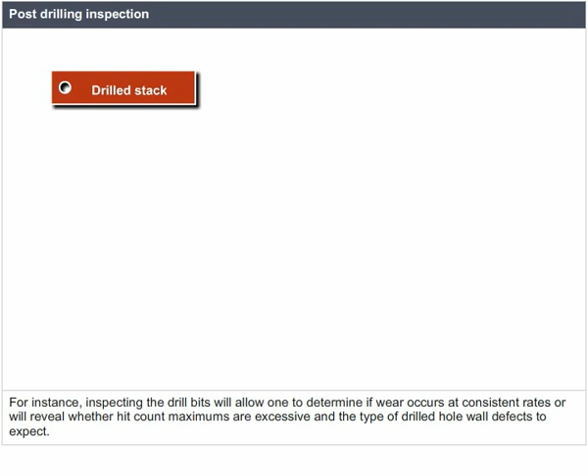Post-drilling inspection. A wealth of information is available by simply examining the materials from the drilled stack and the drill bits. For instance, inspecting the drill bits will allow one to determine if wear occurs at consistent rates, or will reveal whether hit count maximums are excessive and the type of drill hole wall defects to expect.

Bonded debris and/or extensive wear to the drill corners imply high drilling temperatures or materials that are not fully cured, and point to a problem with the materials or may suggest an excessive surface speed.

Extensive primary cutting edge wear indicates abrasive materials and may require lowering stack heights, reducing hit counts, or replacing entry or backup materials.

Post-drilling inspection continued. Burrs on the surfaces within the stack means that there is a problem with the way panels are assembled and pinned, or it may be the result of warped panels.

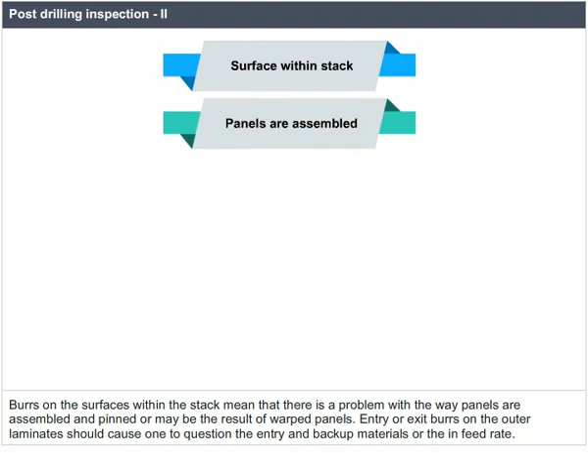Entry or exit burrs on the outer laminates should cause one to question the entry or backup materials, or the in-feed rate. The point of the post-drilling inspection process is that if one takes time on a regular basis to examine materials and drill bits after drilling, many drilling problems would be solved before they get out of hand.

Soldering. Soldering is a process in which two or more metal items are joined together by melting and flowing a filler metal, solder, into the joint. The filler metals have a lower melting point than the adjoining metal.

Soldering differs from welding in that soldering does not involve melting the workpieces. In brazing, the filler metal melts at a higher temperature, but the workpiece metal does not melt.

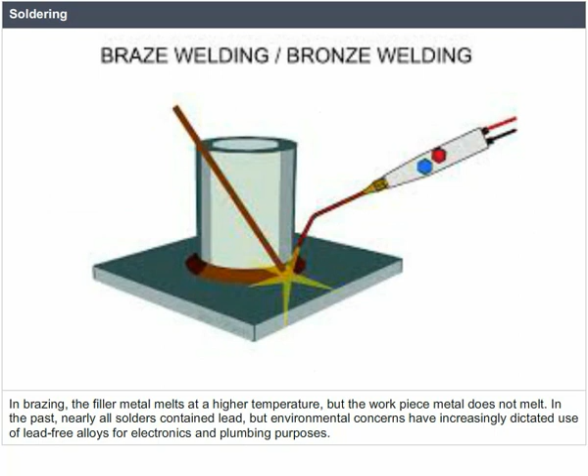In the past, nearly all solders contained lead, but environmental concerns have increasingly dictated use of lead-free alloys for electronics and plumbing purposes. Applications: soldering is used in plumbing, electronics, and metalworking, from flashing to jewelry.

Soldering provides reasonably permanent but reversible connections between copper pipes in plumbing systems, as well as joints in sheet metal objects such as food cans, roof flashing, rain gutters, and automobile radiators.

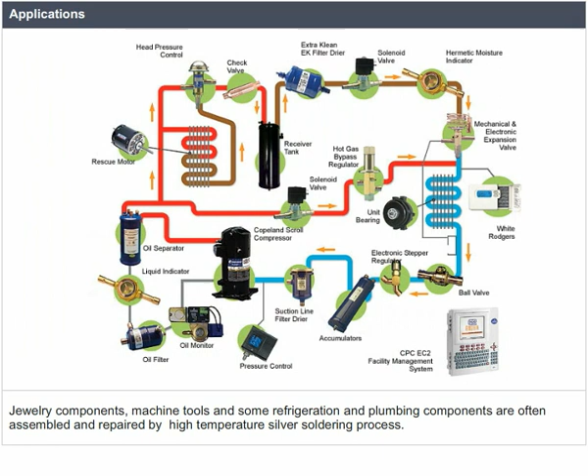Jewelry components, machine tools, and some refrigeration and plumbing components are often assembled and repaired by the high-temperature silver soldering process. Small mechanical parts are often soldered or brazed as well.

Soldering is also used to join lead came and copper foil in stained glass work. It can also be used as a semi-permanent patch for a leak in a container or cooking vessel. Electronic soldering connects electrical wiring and electronic components to printed circuit boards, PCBs.

Types of solders. Most solder metals are alloys of tin and lead. These alloys exhibit a wide range of melting points, so different types of soldering metal can be used for a variety of applications. The percentage of lead is kept low due to its toxic properties.

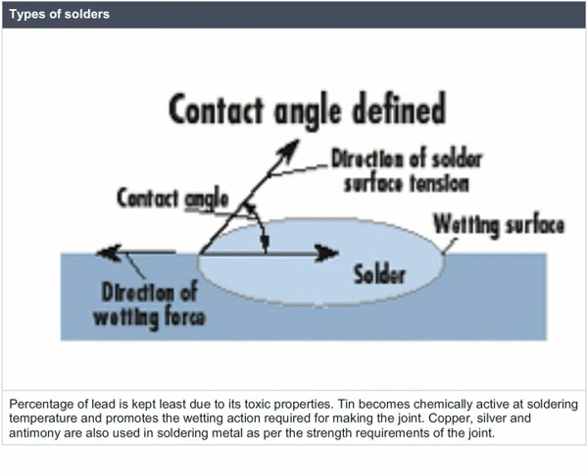Tin becomes chemically active at soldering temperature and promotes a wetting action required for making the joint. Copper, silver, and antimony are also used in soldering metal as per the strength requirements of the joint. Different solder metals have different melting points and varying applications.

Types of solders continued. A solder is selected on the basis of its melting point. If the metals to be joined have a high melting point, a solder of high melting point is generally selected, as it provides better strength of the joint.

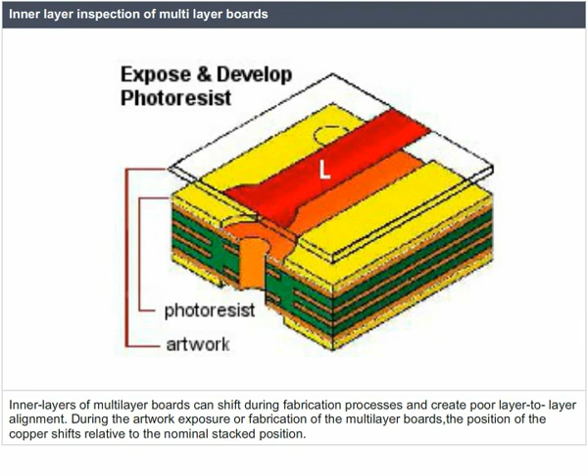Inner layer inspection of multi-layer boards. Inner layers of multi-layer boards can shift during fabrication processes and create poor layer-to-layer alignment.

During the artwork exposure or fabrication of the multi-layer boards, the position of the copper shifts relative to the nominal stacked position. This can create breakout or missing copper pads when drilling the interconnection holes.

Two methods of inspecting the inner layers of multi-layer panels exist. One that has been used for several years is X-ray. This technology has progressed significantly and is widely used.

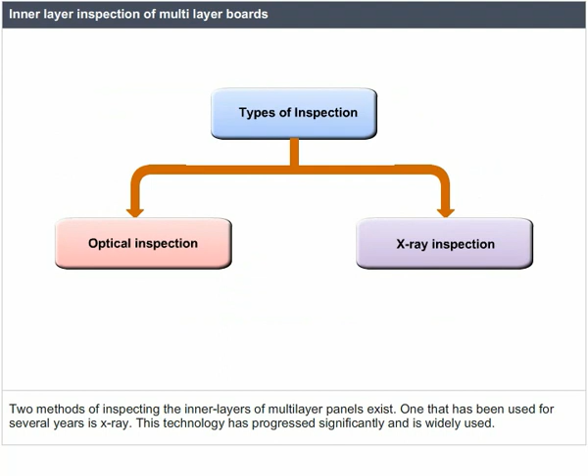X-ray technology is used to inspect the inner layers of multi-layer PCBs and to verify that the drill pads are located properly. Inner layer shift is identified easily in an X-ray image, and a simple technique can be used to measure the misalignment accurately.

In developing the PCB artwork, a set of stacked pads are located in the coupon area. These are inspected and a best fit centering is calculated.

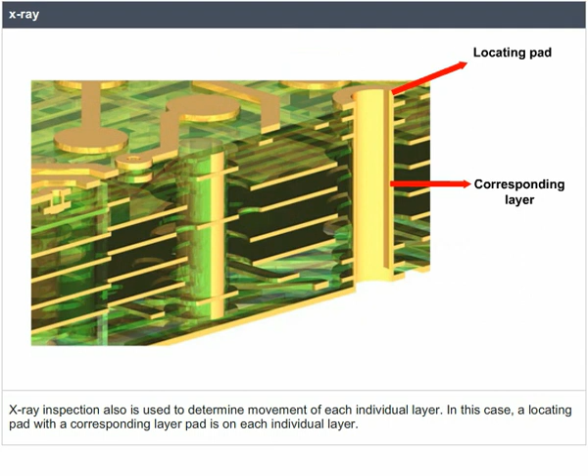X-ray inspection is also used to determine movement of each individual layer. In this case, a locating pad with a corresponding layer pad is on each individual layer. The system can measure the distance from the locating pad to a layer pad and determine movement of each layer due to the location of the layer pads.

PCBs can be inspected after tooling holes are drilled to verify that they are in the proper locations. In addition, X-ray inspection can be performed after final drilling to verify that the holes are centered within the pads.

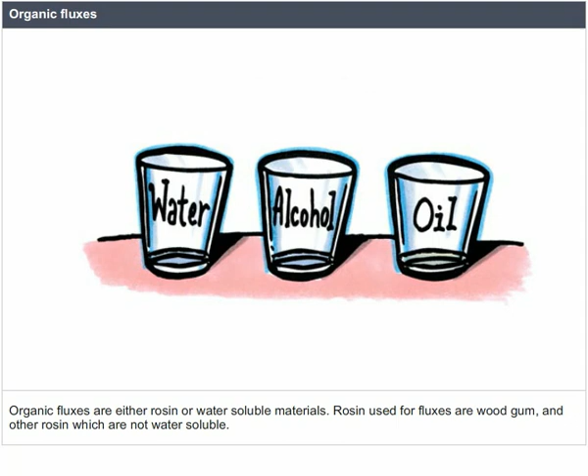Types of soldering fluxes. Soldering fluxes can be classified as organic and inorganic fluxes. Organic fluxes are either rosin or water-soluble materials. Rosin used for fluxes are wood gum and other rosin which are not water-soluble. Organic fluxes are mostly used for electrical and electronic circuit making.

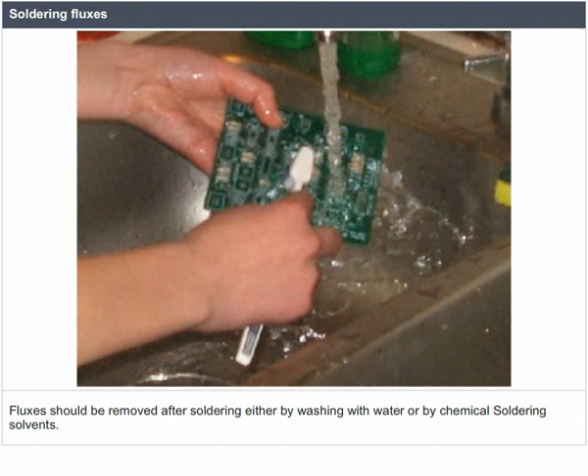These are chemically active at elevated temperature but non-corrosive at room temperature. Inorganic fluxes consist of inorganic acids, mixture of metal chlorides. These are used to achieve rapid and active fluxing where formation of oxide films is a problem. Fluxes should be removed after soldering either by washing with water or by chemical soldering solvents.

The main functions performed by fluxes are: remove oxide films and tarnish from base part surfaces, prevent oxidation during heating, and promote wetting of the faying surfaces. The fluxes should be molten at soldering temperature, be readily displaced by the molten solder during the process, and leave a residue that is non-corrosive and non-conductive.

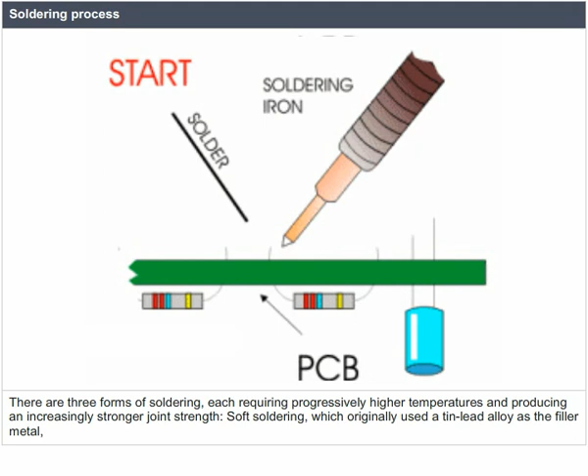Soldering process. There are three forms of soldering, each requiring progressively higher temperatures and producing an increasingly stronger joint strength: soft soldering, which originally used a tin lead alloy as a filler metal; silver soldering, which uses an alloy containing silver; and brazing, which uses brass alloy for the filler.

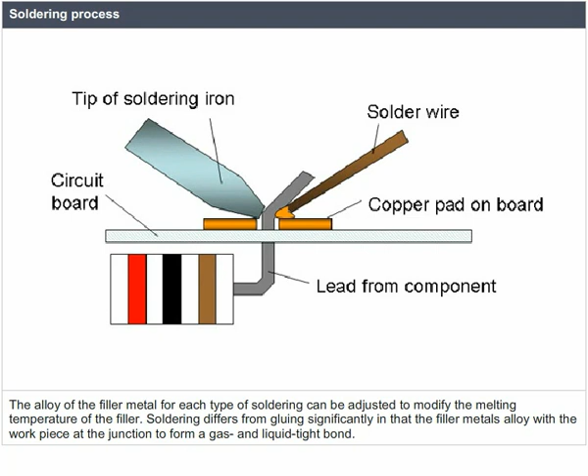The alloy of the filler metal for each type of soldering can be adjusted to modify the melting temperature of the filler. Soldering differs from gluing significantly in that the filler metals alloy with the workpiece at the junction to form a gas and liquid tight bond.

Soft soldering is characterized by having a melting point of the filler metal below approximately 400 degrees Celsius or 750 degrees Fahrenheit, whereas silver soldering and brazing use higher temperatures, typically requiring a flame or carbon arc torch to achieve the melting of the filler. Soft solder filler metals are typically alloys that have liquidus temperatures below 350 degrees Celsius.

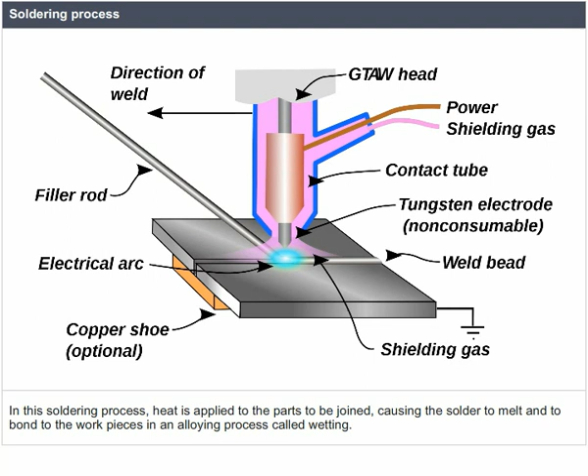In this soldering process, heat is applied to the parts to be joined, causing the solder to melt and bond to the workpieces in an alloying process called wetting. In stranded wire, the solder is drawn up into the wire by capillary action in a process called wicking. Capillary action also takes place when the workpieces are very close together or touching.

The joint's tensile strength is dependent on the filler metal used. Soldering produces electrically conductive, water and gas-tight joints. Each type of solder offers advantages and disadvantages. Soft solder is so called because of the soft lead that is primarily its ingredient.

Soft soldering uses the lowest temperatures but does not make a strong joint and is unsuitable for mechanical load-bearing applications. It is also unsuitable for high-temperature applications as it softens and melts.

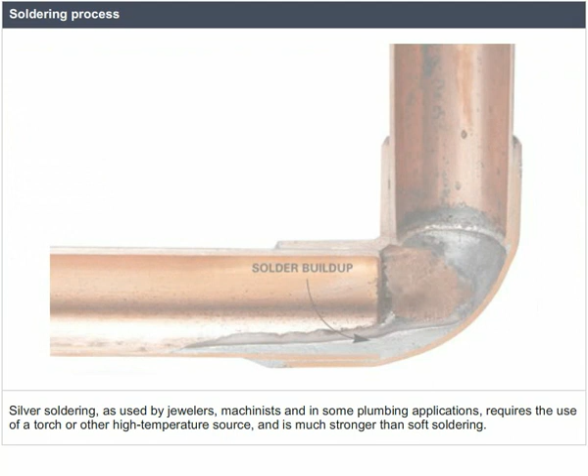Silver soldering, as used by jewelers, machinists, and in some plumbing applications, requires the use of a torch or other high-temperature source and is much stronger than soft soldering.

Brazing provides the strongest joint but also requires the hottest temperatures to melt the filler metal, requiring a torch or other high-temperature source and darkened goggles to protect the eyes from the bright light produced by the white-hot work. It is often used to repair cast-iron objects, wrought iron furniture, etc.

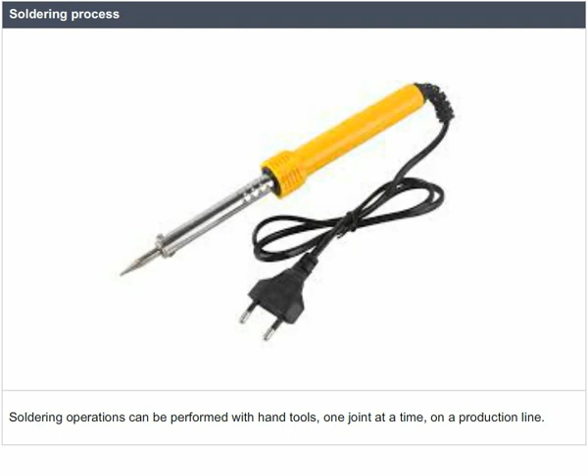Soldering operations can be performed with hand tools, one joint at a time, on a production line. Hand soldering is typically performed with a soldering iron, soldering gun or a torch, or occasionally a hot air pencil. Sheet metal work was traditionally done with soldering coppers directly heated by a flame, with sufficient stored heat in the mass of the soldering copper to complete a joint.

Torches or electrically heated soldering irons are more convenient. All soldered joints require the same elements: cleaning of the metal parts to be joined, fitting up the joint, heating the parts, applying flux, applying the filler, removing heat and holding the assembly still until the filler metal has completely solidified. Depending on the nature of flux material used, cleaning of the joints may be required after they have cooled.

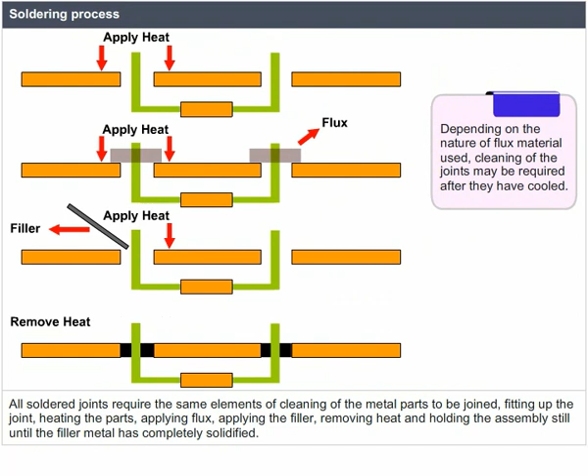Each alloy has characteristics that work best for certain applications, notably strength and conductivity, and each type of solder and alloy has different melting temperatures.

The term silver solder likewise denotes the type of solder that is used. Some soft solders are silver-bearing alloys used to solder silver-plated items. Lead-based solders should not be used on precious metals because the lead dissolves the metal and disfigures it.

Soldering and brazing process.

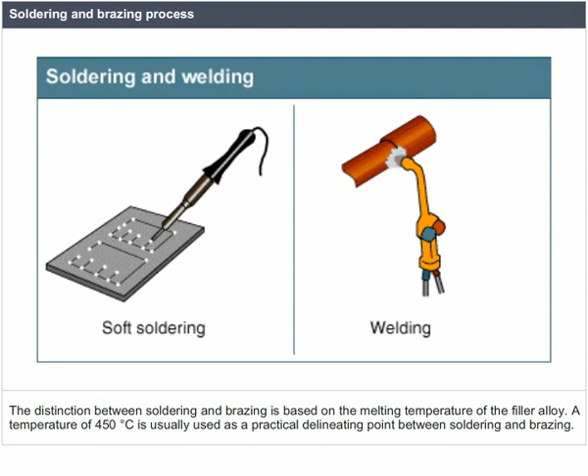The distinction between soldering and brazing is based on the melting temperature of the filler alloy. A temperature of 450 degrees Celsius is usually used as a practical delineating point between soldering and brazing. Soft soldering can be done with a heated iron, whereas the other methods require a high-temperature torch or furnace to melt the filler metal. Different equipment is usually required since a soldering iron cannot achieve high enough temperatures for hard soldering or brazing. Brazing filler metal is stronger than silver solder, which is stronger than lead-based soft solder.

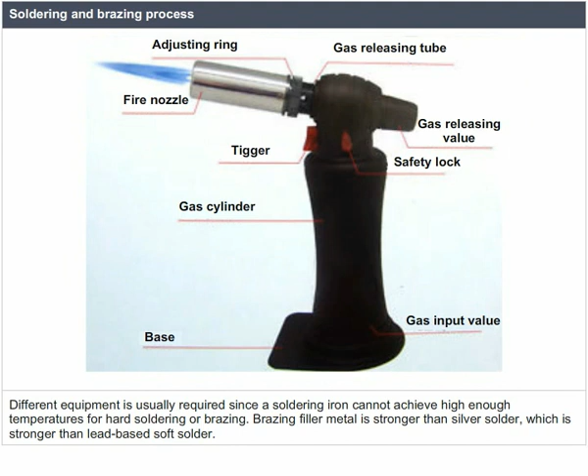Brazing solders are formulated primarily for strength. Silver solder is used by jewelers to protect the precious metal and by machinists and refrigeration technicians for its tensile strength but lower melting temperature than brazing, and the primary benefit of soft solder is a low temperature.

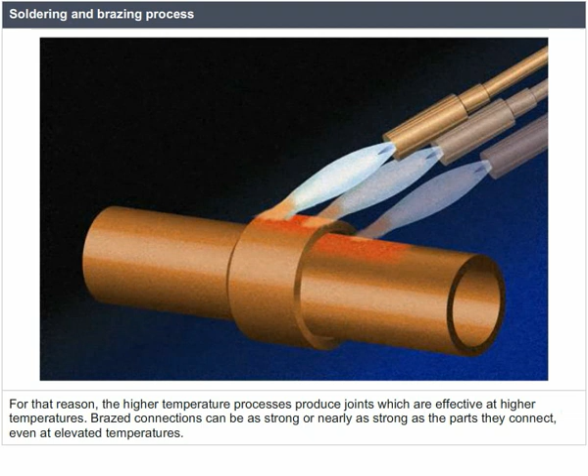Since the joint is produced using a metal with a lower melting temperature than the workpiece, the joint will weaken as the ambient temperature approaches the melting point of the filler metal. For that reason, the higher temperature processes produce joints which are effective at high temperatures. Brazed connections can be as strong or nearly as strong as the parts they connect, even at elevated temperatures.

Optical inspection has been discussed elsewhere. It is generally applied early in the fabrication process as a yield improvement and data collection tool, not as a means of final product qualification.

However, with improvements in resolution, the type of defects that may escape undetected becomes somewhat more limited, and optical inspection is argued as a possible means of final testing.

With complex multi-layer product, optical inspection will not be able to identify assembly or contamination-induced defects internal to the board in any case, and may still be limited in cases of contaminants or very fine geometry shorts and opens on external layers.

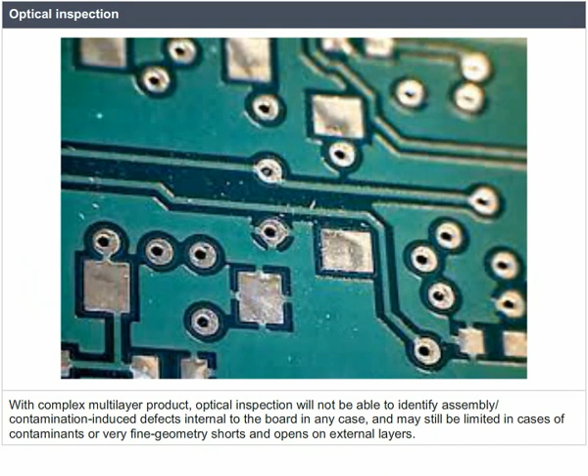The equipment is somewhat slower than universal grid test systems, particularly when run at very high resolution. For such reasons, it is still not common practice to employ optical inspection by itself as a substitute for electrical testing. This may be a method that develops further in the future or that finds acceptance in special circumstances.

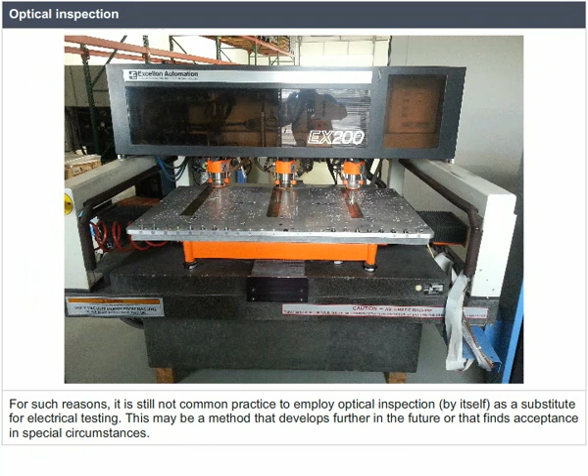Inspection under UV light is used to verify complete coverage and touch-up. Coatings contain a fluorescent dye that will glow under UV light and show where the coating has or has not been applied. Areas without coating can be touched up at this time.

The areas most susceptible to insufficient coating are corners of parts where the coating can flow away and leave little behind, the protruding ends of through-hole part leads, and the shadowed areas under or behind larger components.

If large flat areas are uncoated and show beads of coating, there is a wetting problem due to improper surface preparation or a material incompatibility.

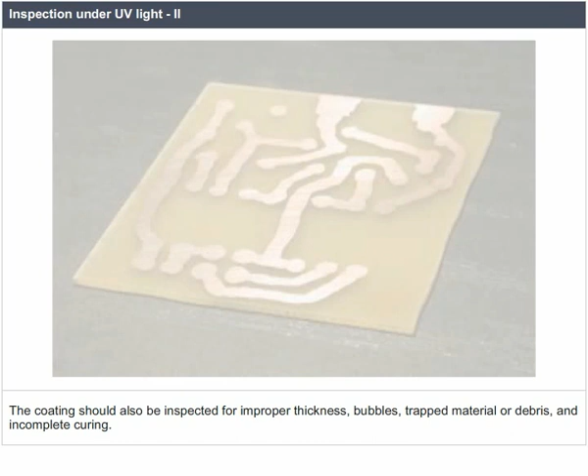Continuing inspection under UV light: the coating should also be inspected for improper thickness, bubbles, trapped material or debris, and incomplete curing.

Mask material should be removed carefully. To prevent peeling, it may be desirable to score or cut the coating at the edge of the mask so that the coating tears along the correct line.

Ensure that the mask is removed entirely and that no residue has been left behind on the board. Latex mask that has been overheated will be sticky and difficult to remove completely, as will overheated masking tapes.

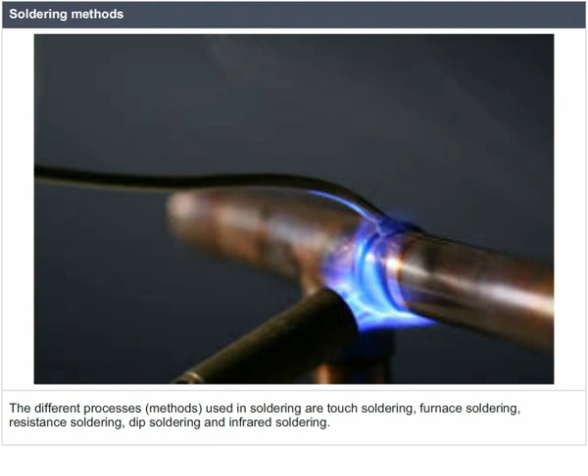Soldering methods: there is a lot of similarity between soldering processes. The different processes or methods used in soldering are touch soldering, furnace soldering, resistance soldering, dip soldering, and infrared soldering. These may apply to hand soldering, wave soldering, and reflow soldering.

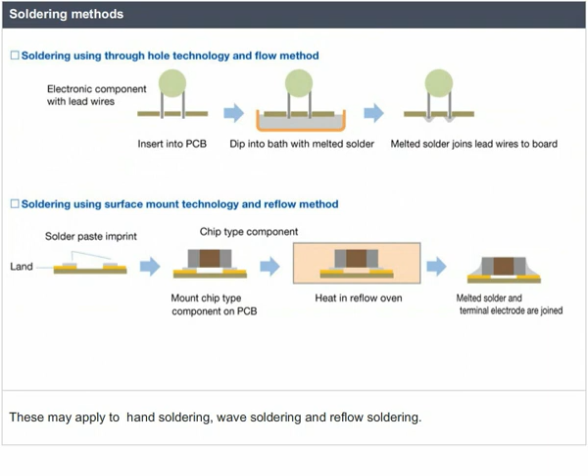Hand soldering is done manually using a solder iron. Small joints are made this way in a very short duration of approximately 1 second.

Wave soldering is a mechanical technique that allows multiple lead wires to be soldered to a printed circuit board as it passes over a wave of molten solder.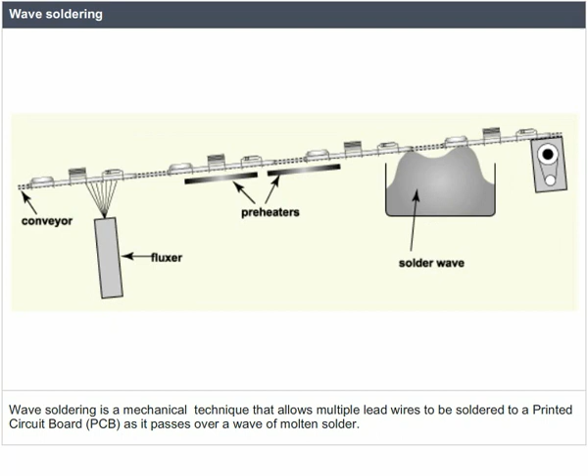In this process, a PCB on which electronic components have been placed with their lead wires extending through the holes in the board is loaded onto a conveyor for transport through the wave soldering equipment. The conveyor supports the PCB on its sides, so its underside is exposed to the processing steps, which consist of the following.

Flux is applied through foaming, spraying, or brushing, and wave soldering is used to pump liquid solder from a molten bath onto the bottom of the board to make soldering connections between lead wires and the metal circuit on the board. Reflow soldering is also widely used in electronics to assemble surface mount components to printed circuit boards.

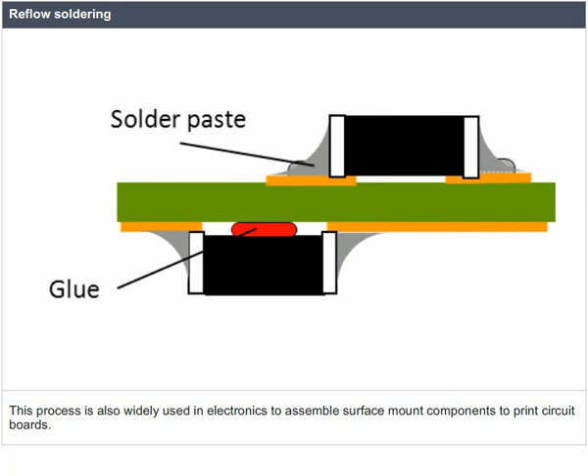In this process, a solder paste consisting of solder powders in a flux binder is applied to spots on the board where electrical contacts are to be made between surface mount components and the copper circuit. The components are placed on the paste spots and the board is heated to melt the solder, forming mechanical and electrical bonds between the component leads and the copper on the circuit boards.

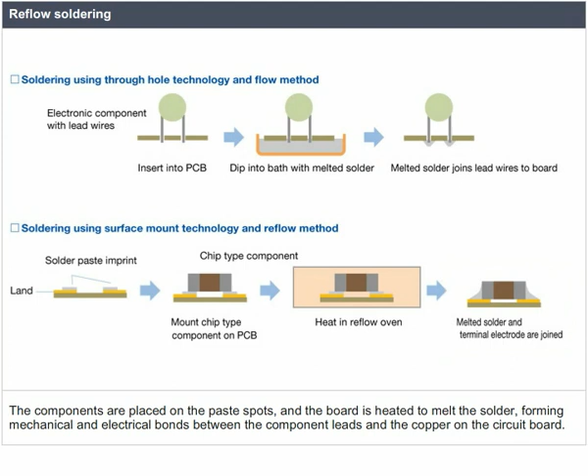Inspection and testing. There are various types of connector inspection: PCA inspection, solder sliver inspection, electrical testing, and tool check.

Connector inspection. Check the connector after pressing for even bottom side pin protrusion, top side connector body seating height, damage to the connector body, inaccurate mating pin positions within the connector as opposed to within the board, and damage or movement of electrical shields if the connector is so equipped.

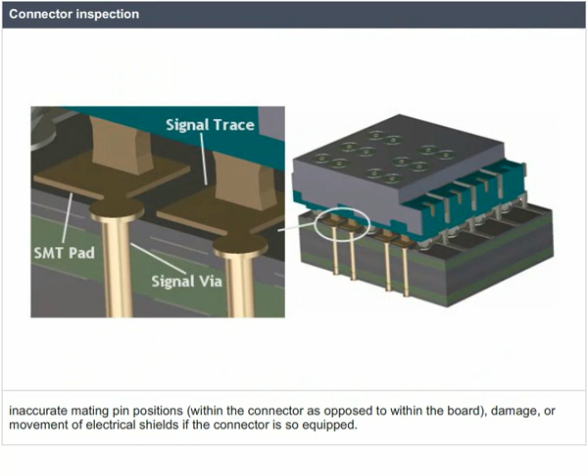PCA inspection. Check the PCA for surface damage in the area of the pressing operation. A mispositioned or damaged press tool or board support can damage components or overly compress the laminate, causing outer or inner layer trace damage.

Look for errant tooling marks on the PWB surface after the press fitting operation. Overcompression of the board can lead to compressed or severed traces within the board. A compressed trace may impact current capacity and result in localized circuit overheating or otherwise impact signal integrity.

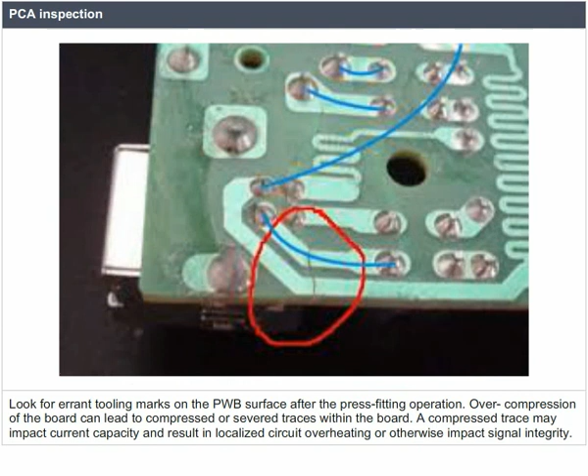Solder sliver inspection. Check the bottom side of the board for solder sliver formation. This is especially relevant in the case of HASL, hot air solder leveling boards. Brush these out if required and inspect. Loose slivers may cause electrical shorting on the board or other boards within the system enclosure.

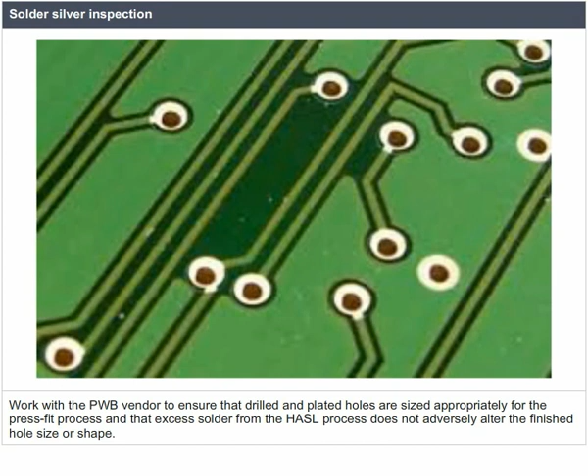Work with the PWB vendor to ensure that drilled and plated holes are sized appropriately for the press fit process and that excess solder from the HASL process does not adversely alter the finished hole size or shape.

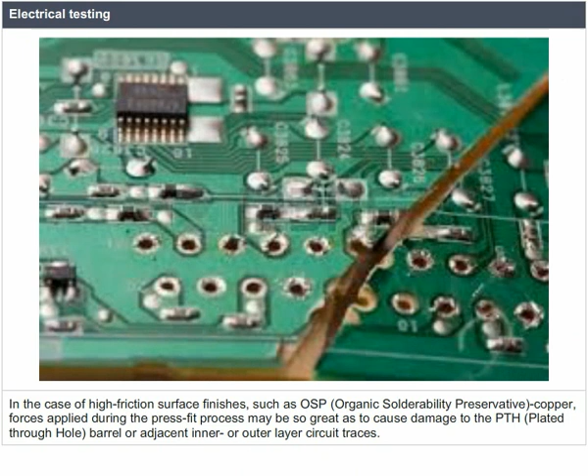Electrical testing. In the case of high-friction surface finishes, such as OSP, Organic Solderability Preservative copper, forces applied during the press-fit process may be so great as to cause damage to the PTH, plated through-hole barrel, or adjacent inner or outer layer circuit traces. Check the board visually and by electrical test as part of the first article inspection.

Check tooling frequently. Check for excessive tool wear or damage. A damaged tool can ruin a connector or PWB and replicate the damage over many boards.

Soldering tools. The main tool used for soldering is a soldering iron. In addition to the soldering iron, some consumables are also used in the process of soldering, like fluxes, solder wire or stick, and spelter.

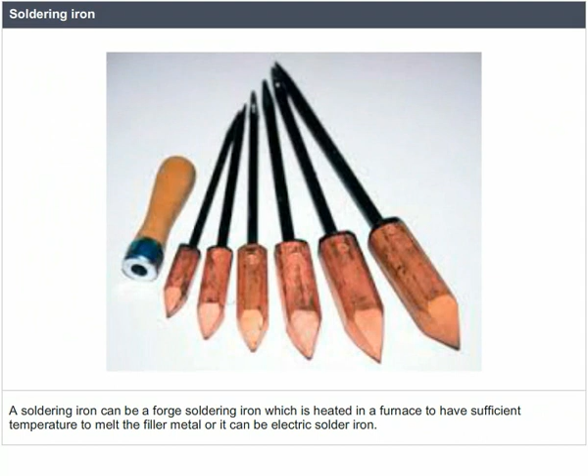Soldering iron. It consists of a copper bit attached to an iron rod at its one end and a wooden handle at the other. It is used to melt the filler metal and paste it to make the joint. A soldering iron can be a forge soldering iron, which is heated in a furnace to have sufficient temperature to melt the filler metal, or it can be an electric solder iron.

Electric solder iron is heated by passing electric current through it. Use of electric solder iron is popular and cost-effective. It is used in making very precise joints in electronic and electrical equipment.

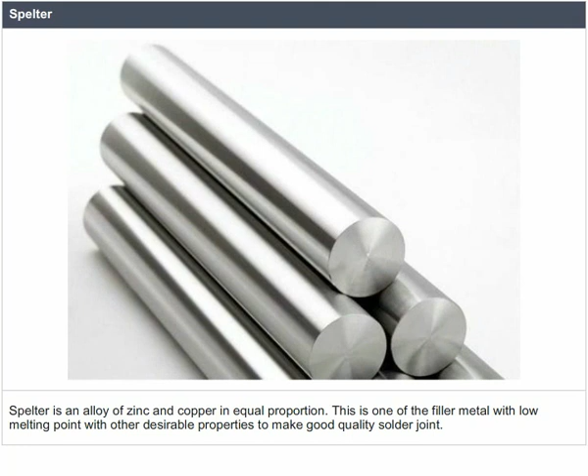Spelter. Spelter is an alloy of zinc and copper in equal proportion. This is one of the filler metals with a low melting point, with other desirable properties to make a good quality solder joint.

Different types of solders and fluxes, which are common consumables used in soldering, have already been described. Some precautions are to be followed to keep the soldering tools as described.

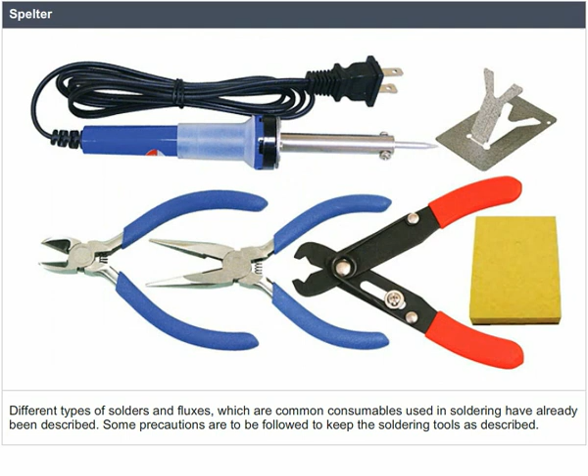Selection of correct tool according to the process. A defective tool should not be used. Electrically heated solder iron should have proper earthing. Hot solder iron, when idle, should be placed on its proper stand. Tip of the solder iron should be cleaned before its use. Solder iron should be gripped at its handle while in use.

Desoldering and resoldering. Used solder contains some of the dissolved base metals and is unsuitable for reuse in making new joints. Once the solder's capacity for the base metal has been achieved, it will no longer properly bond with the base metal, usually resulting in a brittle, cold solder joint with a crystalline appearance.

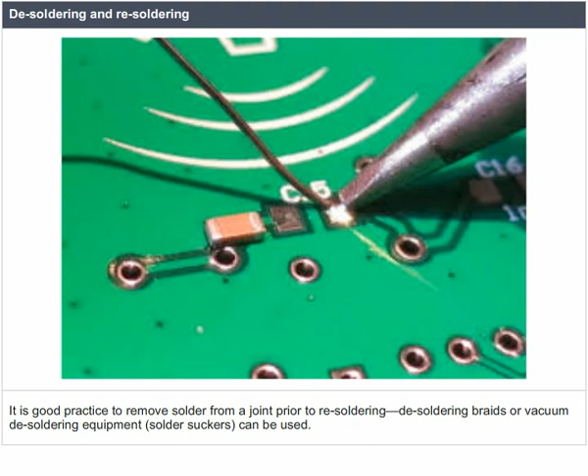It is good practice to remove solder from a joint prior to resoldering. Desoldering braids or vacuum desoldering equipment, solder suckers, can be used. Desoldering wicks contain plenty of flux that will lift the contamination from the copper trace and any device leads that are present.

This will leave a bright, shiny, clean junction to be resoldered. The lower melting point of solder means it can be melted away from the base metal, leaving it mostly intact, though the outer layer will be tinned with solder.

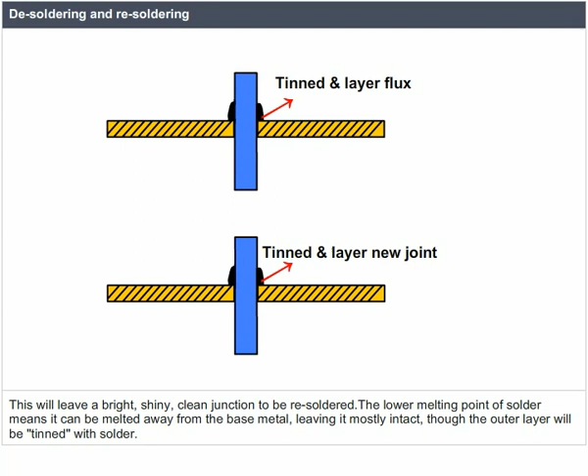Flux will remain, which can easily be removed by abrasive or chemical processes. This tinned layer will allow solder to flow into a new joint, as well as making the new solder flow very quickly and easily.

Lead-free electronic defects. More recently, environmental legislation has specifically targeted the wide use of lead in the electronics industry. The RoHS Restriction of Hazardous Substances directive in Europe requires many new electronic circuit boards to be lead-free by 1st July 2006, mostly in the consumer goods industry, but in some others as well.

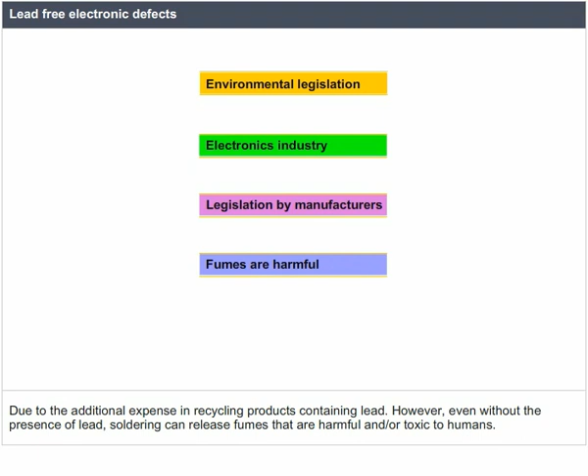In Japan, lead was phased out prior to legislation by manufacturers due to the additional expense in recycling products containing lead. However, even without the presence of lead, soldering can release fumes that are harmful and toxic to humans. It is highly recommended to use a device that can remove the fumes from the work area either by ventilating outside or filtering the air.

It is a common misconception that lead-free soldering requires higher soldering temperatures than lead-tin solder. The wetting temperature in lead-tin solder is higher than the melting point and is a controlling factor. Wave soldering can proceed at the same temperature as previous lead-tin soldering. Nevertheless, many new technical challenges have arisen with this new endeavor.

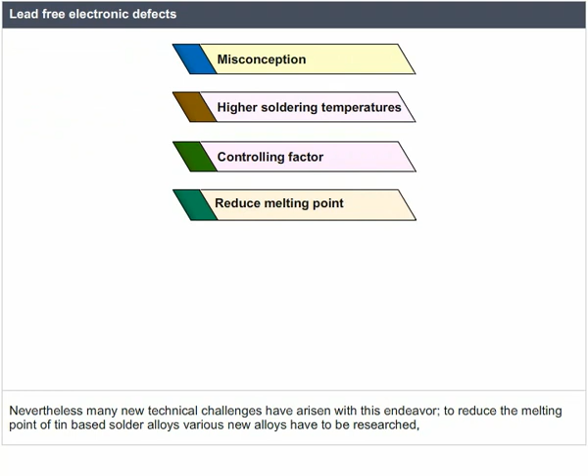To reduce the melting point of tin-based solder alloys, various new alloys have to be researched with additives of copper, silver, and bismuth as typical minor additives to reduce melting point and control other properties. Additionally, tin is a more corrosive metal and can eventually lead to the failure of solder baths, etc.

Lead-free construction has also extended to components, pins, and connectors. Most of these pins use copper frames and either lead, tin, gold, or other finishes. Tin finishes are the most popular of lead-free finishes. Nevertheless, this brings up the issue of how to deal with tin whiskers.

The current movement brings the electronic industry back to the problem solved in the 1960s by adding lead. JEDEC has created a classification system to help lead-free electronic manufacturers decide what provisions to take against whiskers depending upon their application.

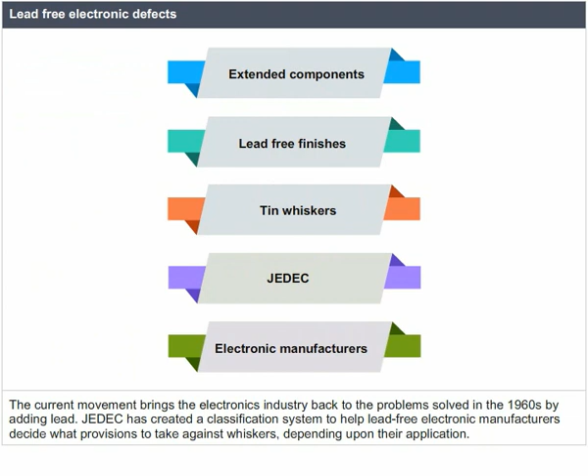Soldering defects. In the joining of copper tube, failure to properly heat and fill a joint may lead to a void being formed. This is usually a result of improper placement of the flame. If the heat of the flame is not directed at the back of the fitting cup, and the solder wire is applied at a 180 degree angle opposite the flame, then solder will quickly fill the opening of the fitting, trapping some flux inside the joint.

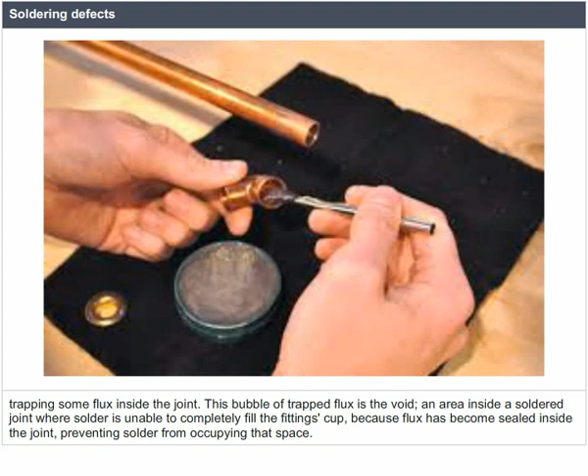This bubble of trapped flux is a void, an area inside a soldered joint where solder is unable to completely fill the fitting's cup because flux has become sealed inside the joint, preventing solder from occupying that space.

Soldering procedure. The following sequential steps should be carried out as soldering procedure. Workpieces which are to be joined together should be perfectly clean. There should not be any dirt, dust, rust, paint, or grease. This is so that the solder or spelter can stick to the joint with proper strength. Cleaning is done with the help of a file or sandpaper.

In case of joining conducting wires, insulation of the portion to be joined should be perfectly removed. Sometimes chemicals are used to clean the workpieces. Descaling is done by dipping the workpieces in dilute hydrochloric acid.

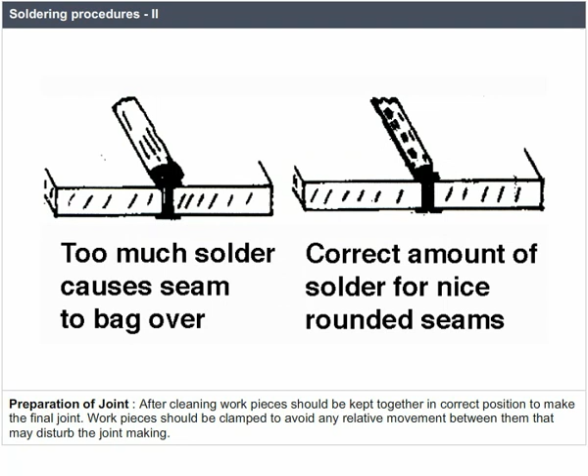Soldering procedures continued. Preparation of joint. After cleaning, workpieces should be kept together in correct position to make the final joint. Workpieces should be clamped to avoid any relative movement between them that may disturb the joint making. At the joint, small grooves are made on the workpieces to facilitate better flow of molten solder and so good strength of the joint.

There are two objectives of a joint: to bear load and to make electrical contact. In case of load-bearing joints, lap joints or butt joints are preferred. It is important to note that the strength of a soldered joint cannot be compared with a welded joint.

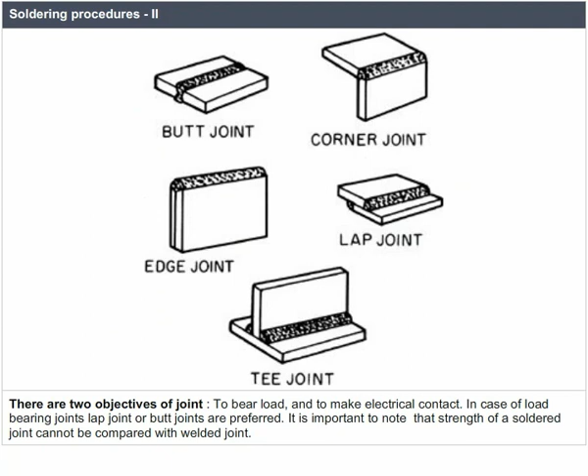If electrical contact is to be made, the solder should be selected so that the resistance of the joint matches the resistance of the conductor.

Fluxing includes selection of appropriate flux and its application to the joint. Selection of flux depends on the material of the workpiece, keeping its purpose in view. It is applied to the joint with the help of a soldering brush before soldering. It avoids oxidation of molten metal, helps in flow of molten solder into the joint, and so maintains strength of the joint.

Inspection categories. There are 4 types of inspection categories: material inspection, qualification inspection, quality conformance inspection, and reliability testing.

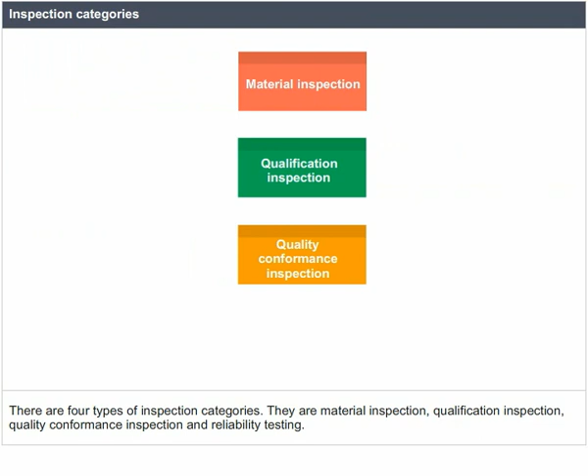Material inspection usually consists of certifications from the material supplier, supported by data from the supplier's own inspections. The materials used must be inspected by the PCB manufacturer to ensure compliance with customer requirements.

Qualification inspection. The PCB supplier must provide proof to the user of its qualifications to build the product specified. The user must then review this proof in order to minimize the risk associated with buying from the PCB manufacturer.

This process usually includes a PCB manufacturer supplying a self-declaration of capability, such as those found in the IPC 1710, and then supplying some kind of physical sample or testing data to support the assertions made in the self-declaration. It is up to the PCB user to determine the level and detail of qualification required.

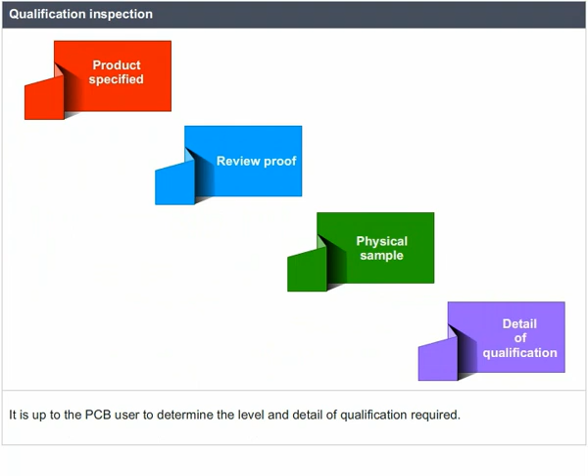Quality conformance inspection. These product verification inspections use specified acceptability criteria and are performed prior to shipment of PCBs to customers. These inspections can be defined either by industry or customer standards, or by a combination of both.

Reliability testing. This testing consists of looking for imperfections in the PCB that may show up at some time during the product's field life. They include accelerated life testing for both the interconnection and insulation attributes of the PCB.

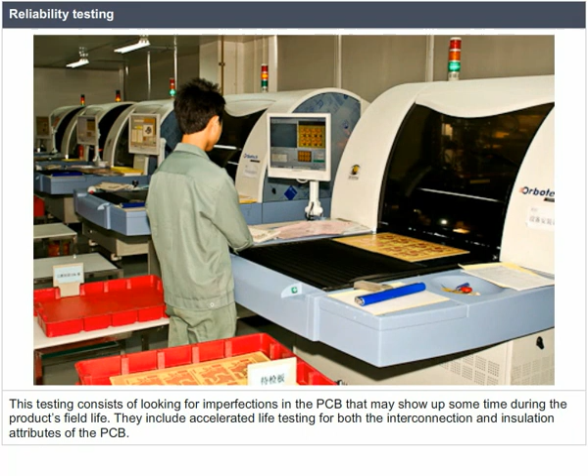Soldering defects and their remedies. Some of the common soldering defects are discussed below. Granular formation at the surface of the joint of solder is one of the common soldering defects.

Formation of spheroids at the surface of soldering joint is also a similar defect. This happens due to underheating or overheating of soldering iron, or insufficient use of flux. Formation of spheroids makes the joint ugly and weak in strength.

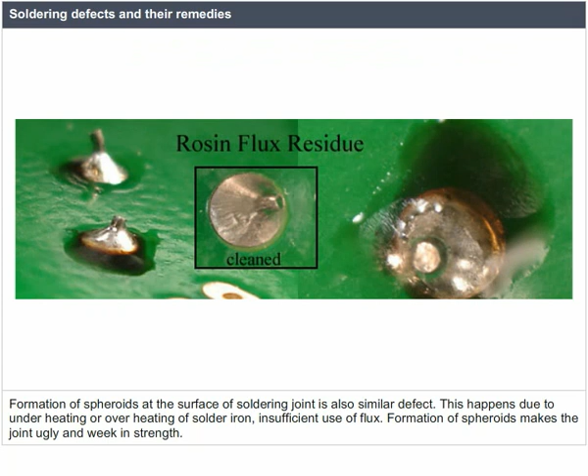Improper or uneven application of flux may make the joint of weak strength. Proper coordination between flux application and soldering makes the joint of good quality.

Safety precautions in soldering. Keep the soldering iron always on its stand. All electrically operated instruments and equipment should have proper earthing.

Sometimes emission of smoke during soldering operation may become poisonous due to a particular type of flux. Operators should have protection from the same. Flux should be applied gradually while soldering.

While diluting HCl, water should not be added to HCl, but HCl should be mixed into the water drop by drop to avoid accidents.

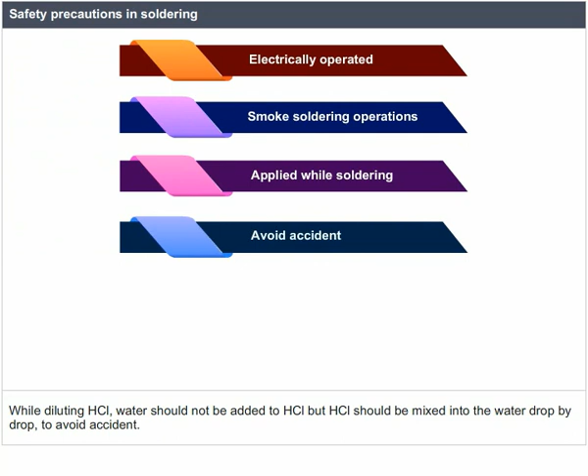Workplace should have enough ventilation and smoking should be strictly prohibited during the operation. Workplace should have the facility of first aid. It should be noted that good quality surface preparation always contributes to a good quality joint.

Electronics. Various problems may arise in the soldering process which lead to joints that are non-functional either immediately or after a period of use. The most common defect when hand soldering results from the parts being joined not exceeding the solder's liquidus temperature, resulting in a cold solder joint.

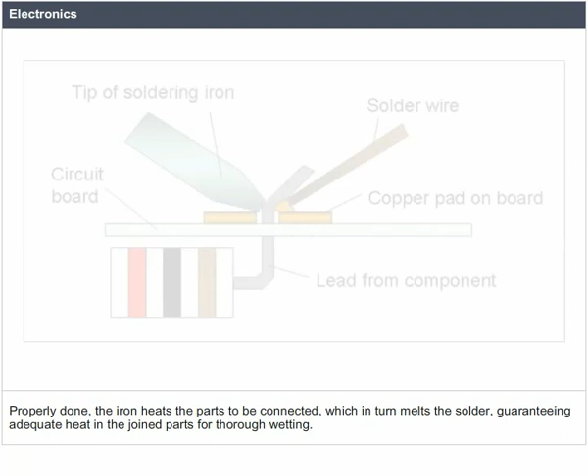This is usually the result of the soldering iron being used to heat the solder directly rather than the parts themselves. Properly done, the iron heats the parts to be connected, which in turn melts the solder, guaranteeing adequate heat in the joined parts for thorough wetting.

In electronic hand soldering, the flux is embedded in the solder. Therefore, heating the solder may cause the flux to evaporate before it cleans the surfaces being soldered. A cold solder joint may not conduct at all, or may conduct only intermittently.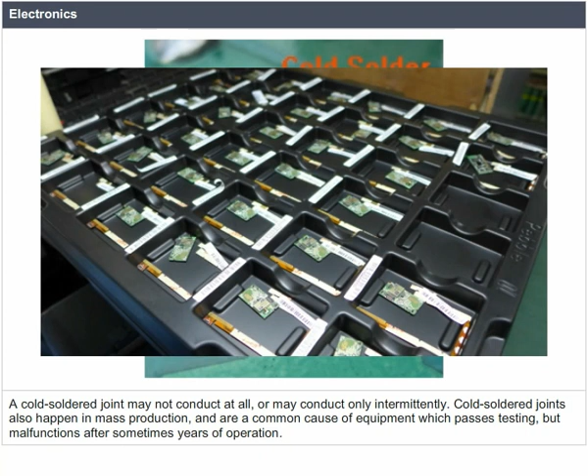Cold solder joints also happen in mass production and are a common cause of equipment which passes testing but malfunctions after some years of operation. A dry joint occurs when the cooling solder is moved, and often occurs because the joint moves when the soldering iron is removed from the joint.

Soldering types and features. Soldering methods are broadly divided into two types: the partial heating method and the total heating method.

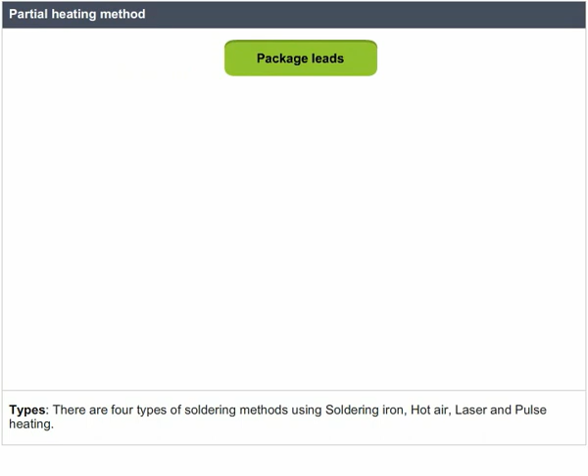Partial heating method. Heat is applied to the package leads and/or PWB, printed wiring board, in a localized manner. There are four types of soldering methods: using soldering iron, hot air, laser, and pulse heating.

Features: Partial heating involves less heat stress on the device and printed wiring board, but is unsuitable for large volume production. Therefore, this method is mainly used to correct soldering or for devices with low heat resistance.

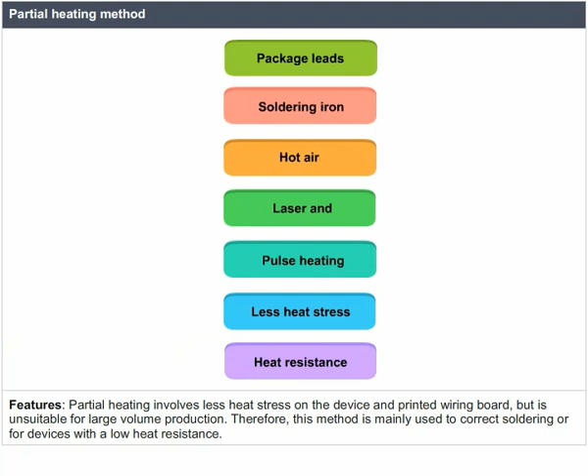Total heating method. Heat is applied to the entire package and/or PWB. There are various types of soldering methods, such as infrared reflow, convection reflow, infrared convection combined, VPS (vapor phase soldering), and flow wave soldering.

Features: Because of excellence in productivity and running cost, the total heating method is widely used. However, this method can place considerable heat stress on the semiconductor device and board.

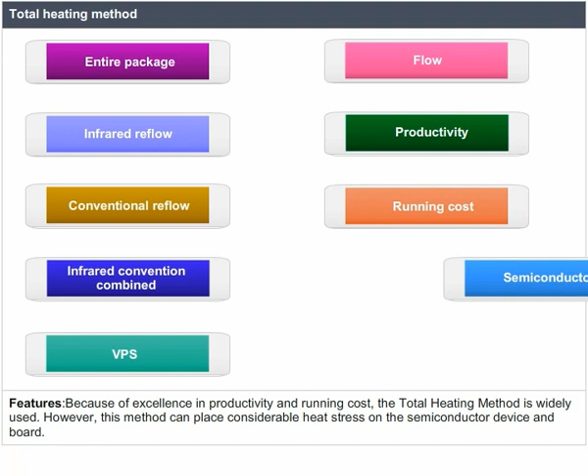Inspection criteria. When inspecting PCBs, the requirements can be separated into externally observable attributes and internally observable attributes. The actual requirements vary by specification, but the requirements stated generally follow IPC document guidelines.

Hand soldering tools widely used for electronic work include the electric soldering iron, which can be fitted with a variety of tips ranging from blunt to very fine, to chisel heads for hot cutting plastics rather than soldering. The simplest irons do not have temperature regulation. Small irons rapidly cool when used to solder, say, a metal chassis, while large irons have tips too cumbersome for working on PCBs and similar fine work.

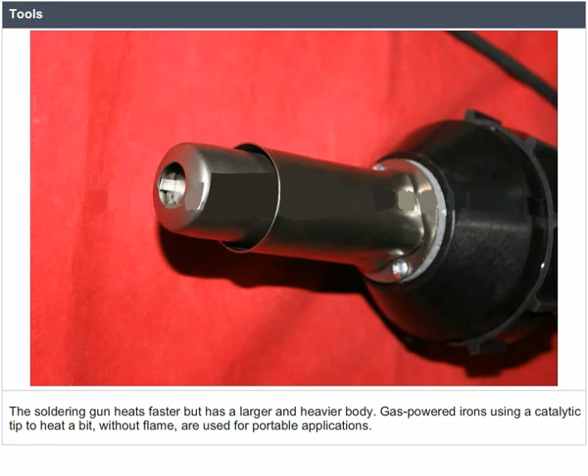Temperature control irons have a reserve of power and can maintain temperature over a wide range of work. The soldering gun heats faster but has a larger and heavier body. Gas-powered irons using a catalytic tip to heat a bit without flame are used for portable applications. Hot air guns and pencils allow rework of component packages which cannot easily be performed with electric irons and guns.

For non-electronic applications, soldering torches use a flame rather than a soldering tip to heat solder. Soldering torches are often powered by butane and are available in sizes ranging from very small butane-oxygen units suitable for very fine but high-temperature jewelry work, to full-size oxy-fuel torches suitable for much larger work such as copper piping. Common multi-purpose propane torches, the same kind used for heat stripping paint and thawing pipes, can be used for soldering pipes and other fairly large objects, either with or without a soldering tip attachment.

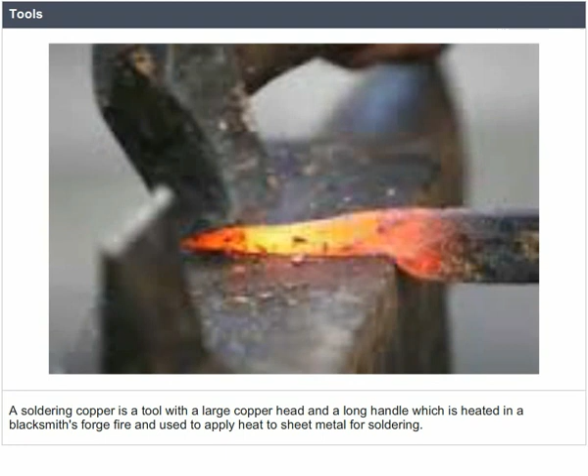Pipes are generally soldered with a torch by directly applying the open flame. A soldering copper is a tool with a large copper head and a long handle, which is heated in a blacksmith's forge fire and is used to apply heat to sheet metal for soldering. Typical soldering coppers have heads weighing between 1 and 4 pounds. The head provides a large thermal mass to store enough heat for soldering large areas before needing reheating in the fire. The larger the head, the longer the working time.

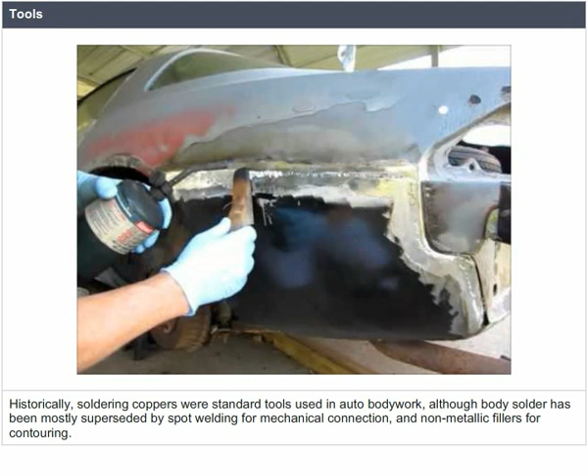Historically, soldering coppers were standard tools used in auto bodywork, although body solder has been mostly superseded by spot welding for mechanical connection and non-metallic fillers for contouring. Toaster ovens and handheld infrared lights have been used by hobbyists to replicate production soldering processes on a much smaller scale. Bristle brushes are usually used to apply plumbing paste flux. For electronic work, flux core solder is generally used, but additional flux may be used from a flux pen or dispensed from a small bottle with a syringe-like needle.

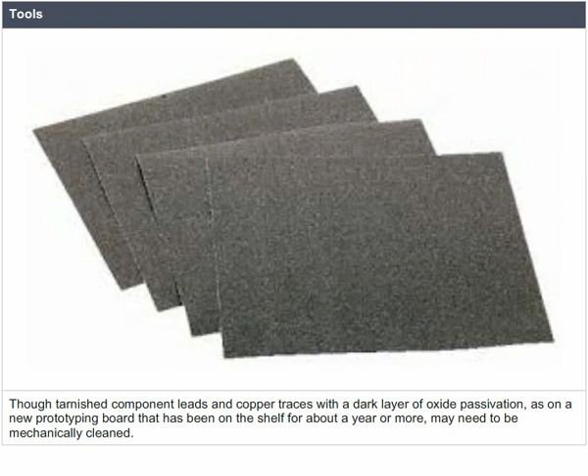Wire brush, wire wool, and emery cloth are commonly used to prepare plumbing joints for connection. Electronic joints are usually made between surfaces that have been tinned and rarely require mechanical cleaning, though tarnished component leads and copper traces with a dark layer of oxide passivation, as on a new prototyping board that has been on the shelf for about a year or more, may need to be mechanically cleaned.

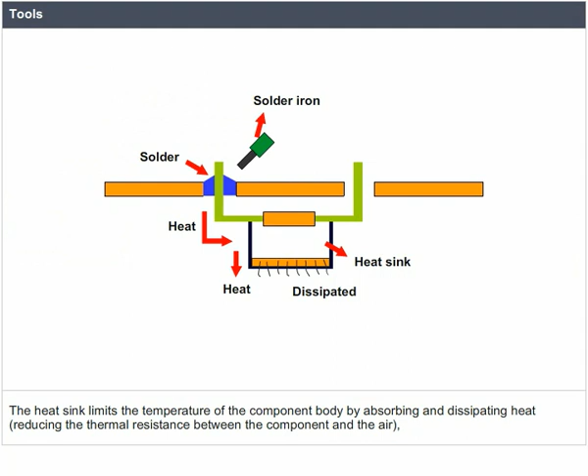A heat sink, such as a crocodile clip, can be used to prevent damaging heat-sensitive components while hand soldering. The heat sink limits the temperature of the component body by absorbing and dissipating heat, reducing the thermal resistance between the component and the air, while the thermal resistance of the leads maintains the temperature difference between the part of the leads being soldered and the component body, so that the leads become hot enough to melt the solder while the component body remains cooler.

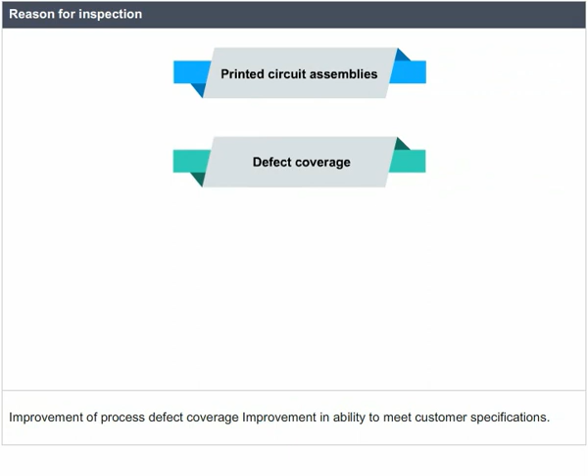Reason for inspection. Manufacturers inspect printed circuit assemblies during production for a variety of reasons. Most of these reasons fall into the following categories: improvement of process defect coverage, improvement in ability to meet customer specifications, detection of process defects as quickly as possible after they occur, and ability to decrease process defect rates through statistical process control.

Automated inspection. The automation of inspection has evolved into systems that resemble the automated test equipment used to make electrical measurements and find electrical defects. Automated inspection systems generate images of the item to be inspected, digitally analyze the image to locate and measure key features, and based on these measurements, automatically decide whether a defect exists or not.

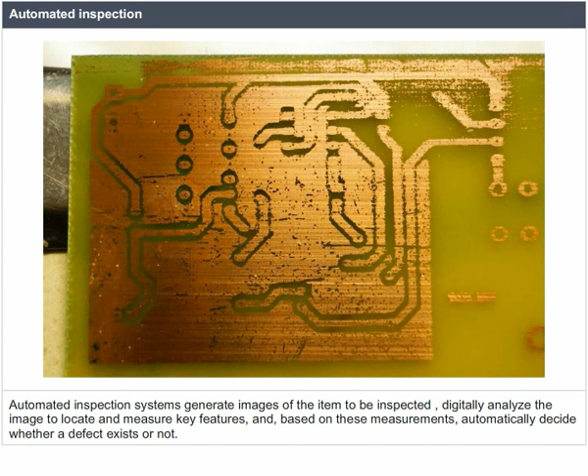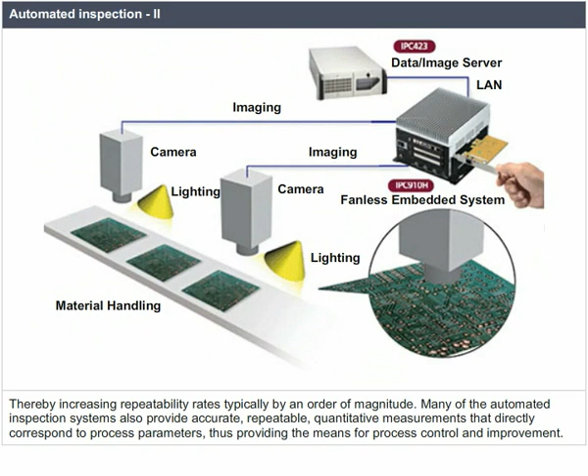Automated inspection continued. Just like visual inspection, automated inspection systems do not require physical contact with the printed circuit assembly to generate the desired images. Unlike visual inspection, however, automated inspection removes human subjectivity from defect detection, thereby increasing repeatability rates, typically by an order of magnitude. Many of the automated inspection systems also provide accurate, repeatable, quantitative measurements that directly correspond to process parameters, thus providing the means for process control and improvement.

Conclusion. In this chapter, we have covered the following aspects of soldering techniques: inspection of populated PCB board.